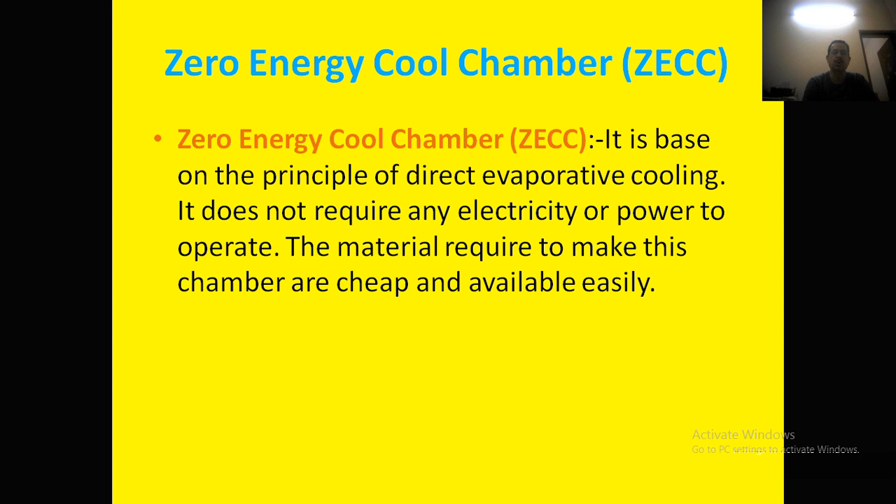First we'll discuss the zero energy cool chamber. It is based on the principle of direct evaporative cooling system. It does not require any electricity or power to operate. The material required to make this chamber is cheap and easily available.

Construction of the zero energy cool chamber: select an upland site having a nearby source of water supply. Make the floor with brick, 165 cm by 115 cm. Erect a double wall to a height of 67.5 cm, leaving a cavity of 7.5 cm.

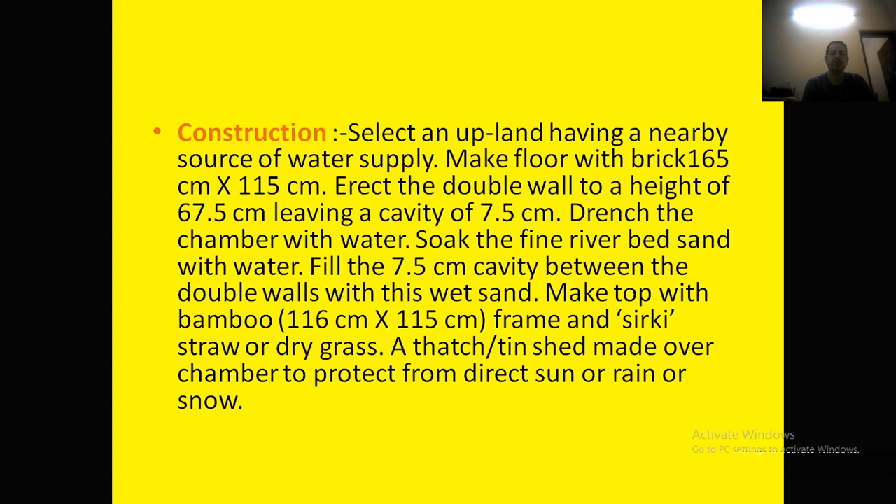Drench the chamber with water. Soak the fine riverbed sand with water. Fill the 7.5 cm cavity between the double wall with this wet sand. Make the top with a bamboo frame, 116 cm by 115 cm, and cover with sirki straw or dry grasses. A thatch or tin shed is made over the chamber to protect it from direct sun, rain or snow.

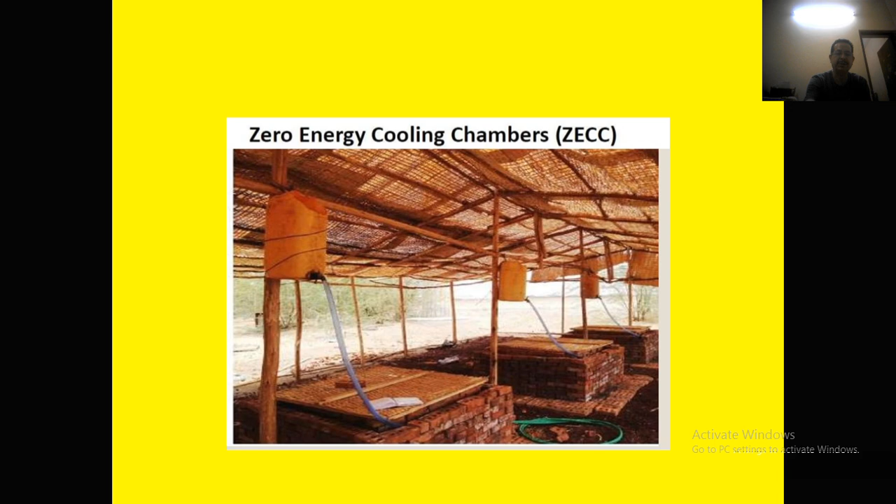This is a picture of the zero energy cool chamber. This is a picture of a series of zero energy cool chambers. The water is connected to a tank which flows into the double wall cavity, as shown in the picture.

How it is operated: keep the sand, brick and top cover of the chamber wet with water. Water twice daily, morning and evening, to achieve the desired temperature and relative humidity. Alternatively, fix a drip system for watering with plastic pipes and micro tubes connected to an overhead water source.

Store the fruit and vegetables in perforated plastic crates. Cover the crates with a thin polythene sheet. Cool chambers should be reinstalled once every 3 years with new bricks. Utilize the old bricks for other purposes.

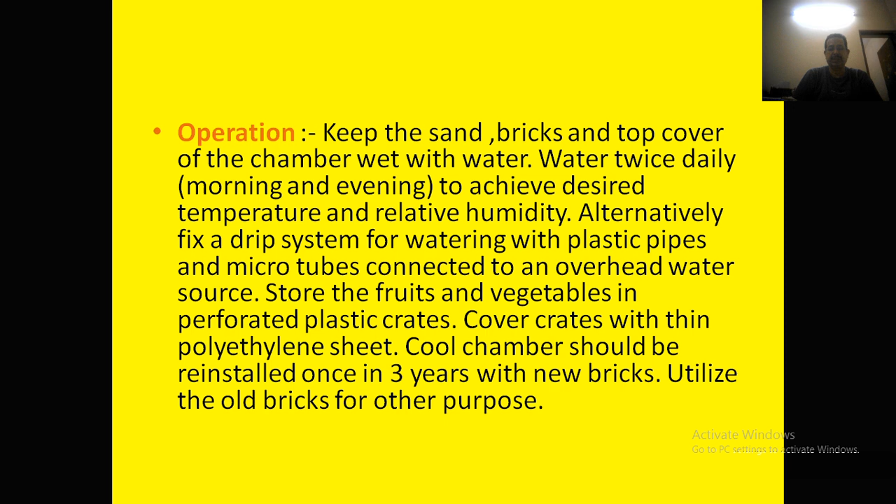Scope of the cool chamber: the proposed cool chamber can be installed in different places for handling fresh produce. In present practice, fruits and vegetables arrive in the wholesale market early in the morning and are purchased by the retailer or consumer before noon. At present, fruits and vegetables are handled in open sheds.

The freshness is prone to considerable deterioration. It is suggested that a battery of such commercial-sized cool chambers can be installed in wholesale markets located near big metropolitan cities.

Units can be installed in two rows with a corridor in between. Each unit will have two doors, one opening into the corridor and the other into the loading and unloading platform. The ducts are open on the roadside as well as on the corridor.

An overhead tank can perform the soaking of the side wall and tanks. Trucks can perform loading and unloading on the platform of each shed. Fruits and vegetables stored temporarily in a cool chamber unit before transit can retain freshness and quality.

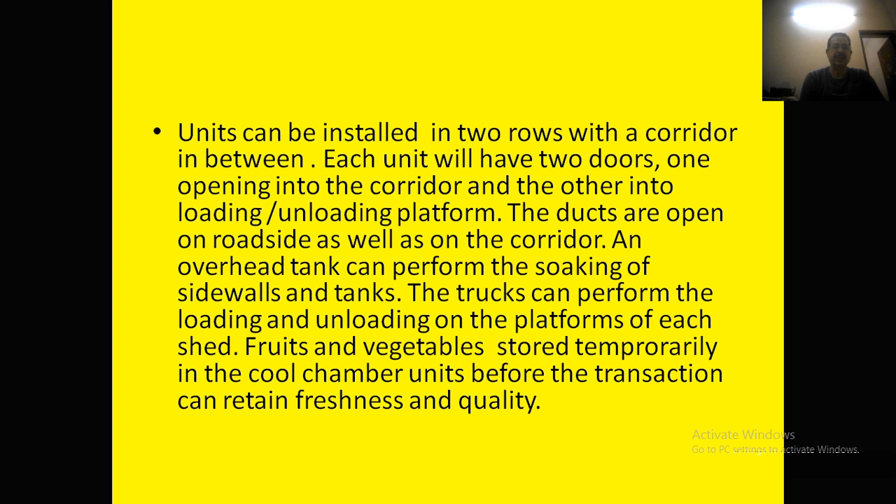Then, evaporative cool storage: it is the best short-term storage method for fruits and vegetables at farm level. It helps the farmer get better returns for their produce. In this structure, horticultural crops reduce traveling losses and extend their storage life.

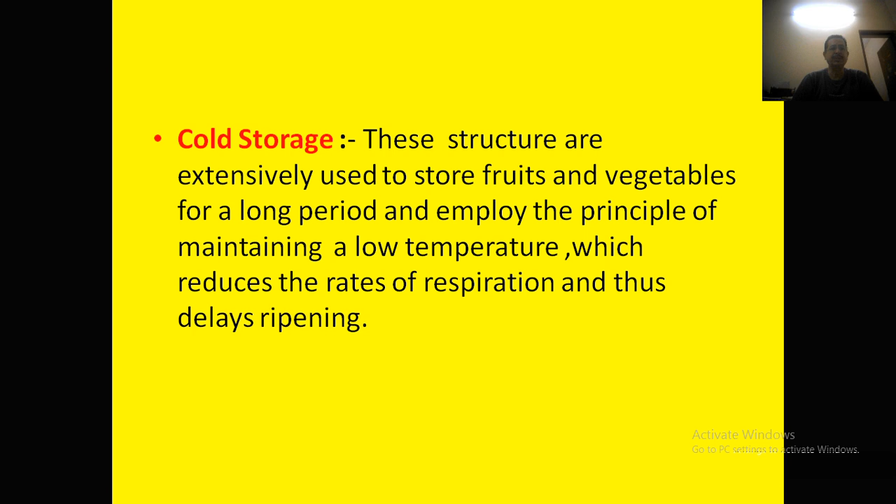Cold storage: these structures are extensively used to store fruits and vegetables for a long period and employ the principle of maintaining a low temperature, which reduces the rate of respiration and thus delays ripening.

Choice of method depends on the type of product available, duration of storage required, cost of storage involved, and the climatic condition of the place where storage is made.

Fruits and vegetables after harvesting continue to respire at the expense of stored food material, which, depending upon the rate of metabolism, can decline or accelerate aging, as evidenced by shriveling accompanied by change in texture, flavor and quality. Natural fruits and vegetables respire and lose heat and moisture through natural pores in the skin.

Removal of heat from freshly harvested commodity without quality loss is the most desired method for extending storage life of the perishable, which is accompanied by washing them in cold water at the production site for removal of the field heat. After removal of the heat, adequate size of cold storage is required.

Storage life of freshly harvested commodity is governed by the following: prevailing climate, that is temperature, relative humidity and airflow rate, and cultural practices of the region; then variety and stage of maturity at harvesting.

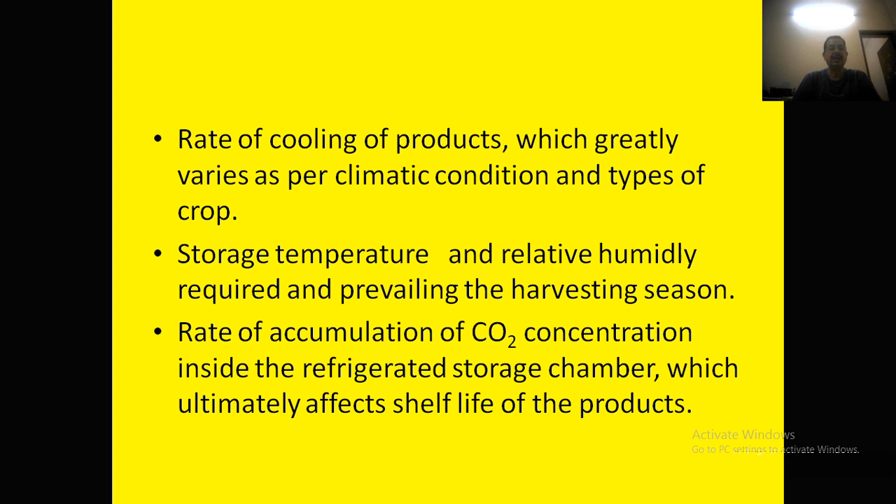Storage temperature and relative humidity required, and the prevailing harvesting season. Rate of accumulation of carbon dioxide concentration inside the refrigerated storage chamber, which ultimately affects shelf life of the products. Air distribution system in the refrigerated cold room, which helps in maintaining quality of the product.

Post-harvest treatment, size of package, quantity per package, and ventilation or air circulation inside the refrigerated storage are important for the storage life.

Sanitary condition inside the refrigerated storage room may affect the expected outcome.

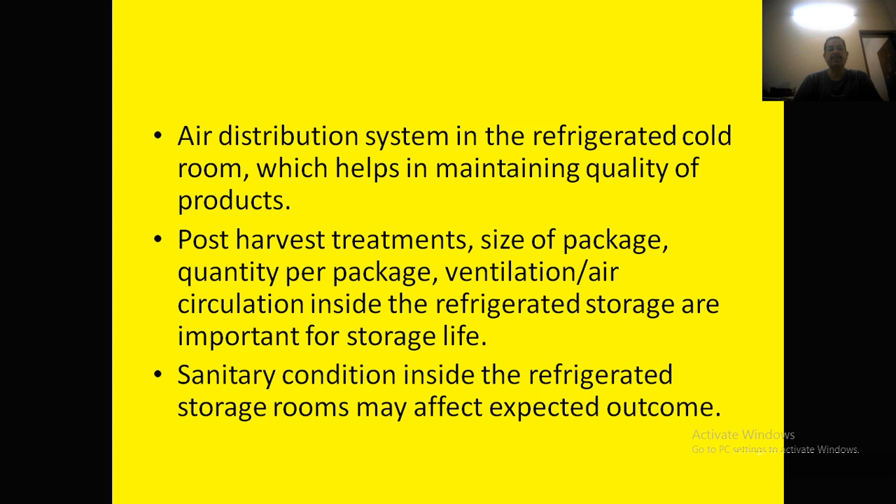Cold storage is one of the widely adopted methods for bulk handling of perishable products between production and marketing or processing. Maintaining adequately low temperature is critical, otherwise it will cause chilling injury to the produce. Further, relative humidity of the crop in the storeroom should be kept as high as 80 to 90% for most perishable products; below or above this has a detrimental effect on the keeping quality of the produce.

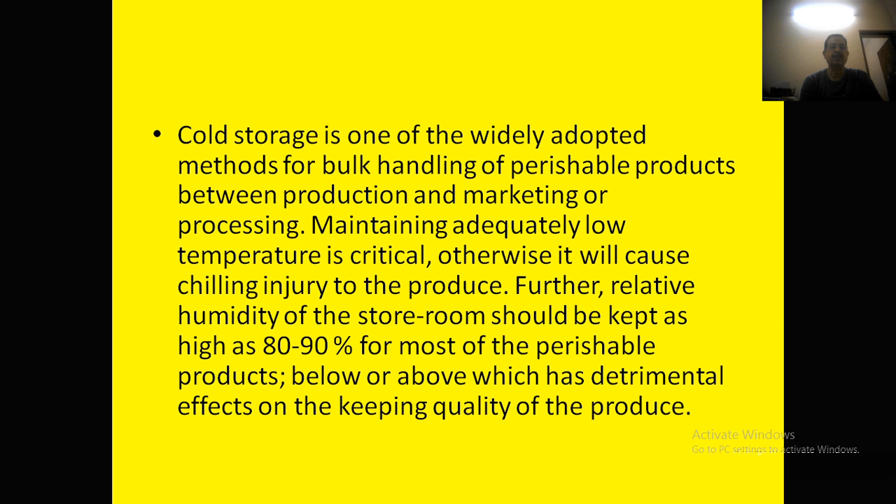Then controlled atmosphere storage. This is defined as an atmosphere in which oxygen is brought down to a low level and carbon dioxide is at a high level, created by the natural respiration of the packed commodity or by artificial means. These gases are controlled by a sequence of measurement and correction throughout the storage period, depending upon the type of fruits and vegetables in storage.

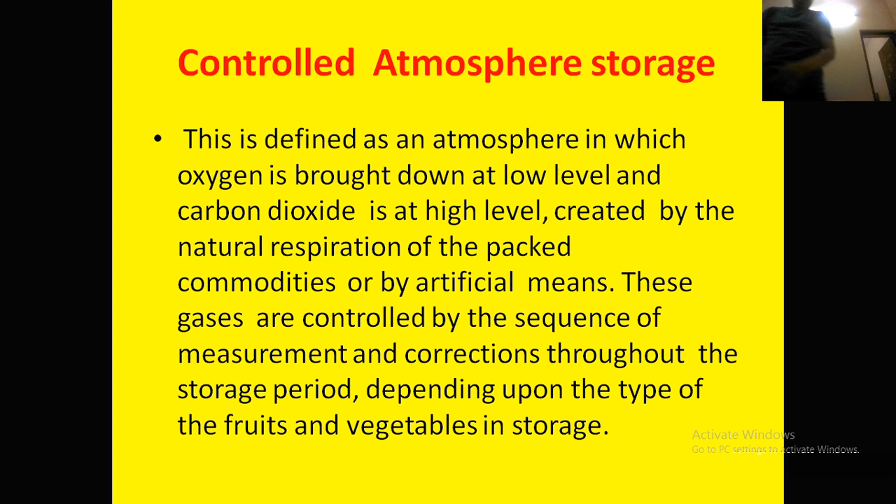In this method, control of oxygen and carbon dioxide around the immediate surface of the commodity and within the fresh fruits and vegetables results in a reduction in the respiration rate of the commodity. The levels of these gases are maintained by constant monitoring and adjustment within the gas tight store or containers.

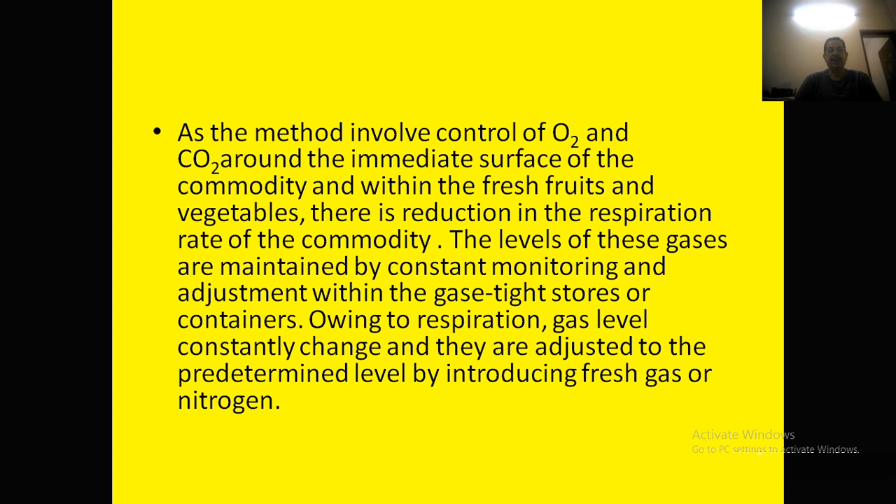Owing to respiration, gas levels constantly change and they are adjusted to the predetermined level by introducing fresh gas or nitrogen.

Then modified atmosphere storage. It is defined as the introduction of an atmosphere other than air into a food package without further modification or control and flushing into the product enclosure. The mixture is maintained throughout the storage life and no further measurement or control is required.

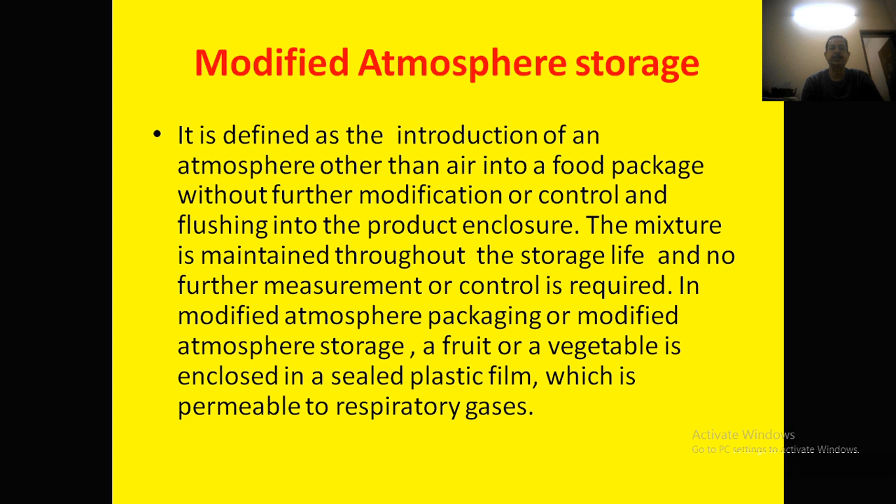In modified atmosphere packaging or modified atmosphere storage, a fruit or vegetable is enclosed in a sealed plastic film which is permeable to respiratory gases. Within the package, gases will change, producing a lower concentration of oxygen and a higher concentration of carbon dioxide than in fresh air, thus retarding ripening.

Modified atmosphere storage is the development of a modified atmosphere around the product through permeable polymeric film. It is an inexpensive method compared to controlled atmosphere storage.

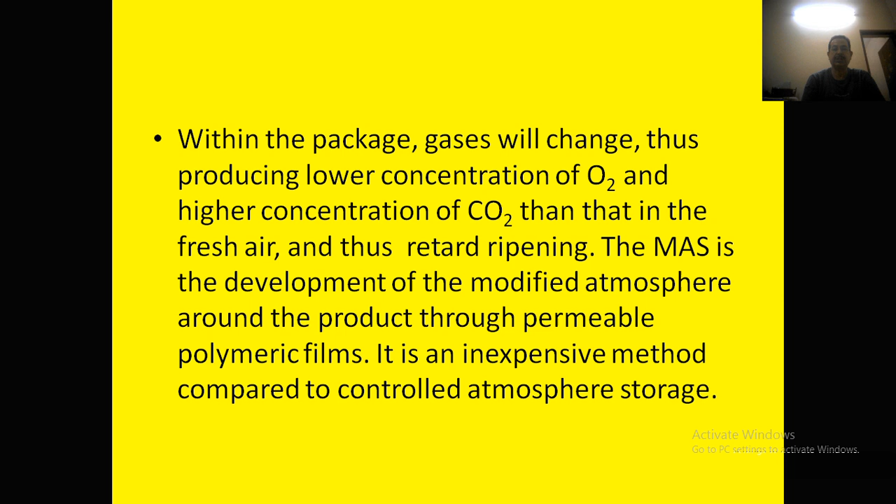In modified atmosphere storage, there is an alteration in the composition of gases in and around the fresh produce due to respiration and transpiration. When such commodities are sealed in plastic film, the film restricts accumulation and transmission of respiratory gases, resulting in accumulation of carbon dioxide and depletion of oxygen around the produce, which increases storage life. This method is used for produce that has high commercial value and requires constant attention during transit and storage for higher returns.

Atmosphere inside the sealed plastic film bag depends on the characteristics of the package material used, the inside environment, and the respiration rate of the produce. Changes in the gas content may take some time to reach equilibrium, and the speed of atmosphere change can be accelerated by flushing with nitrogen, or the pack can be connected to a vacuum pump to remove air so that respiratory gases change fast within the pack.

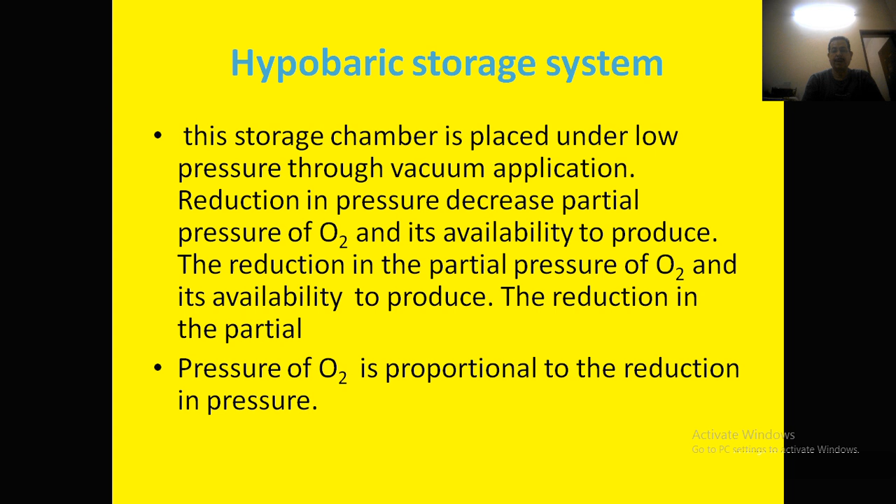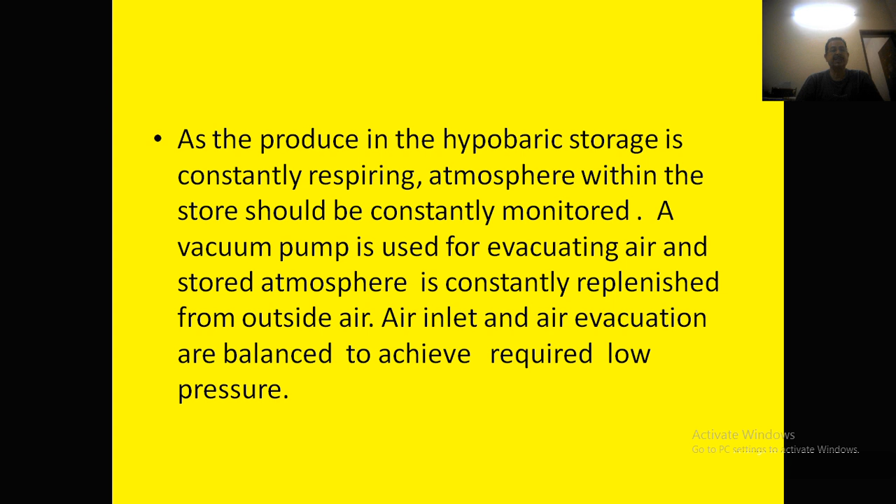As the produce in hypobaric storage is constantly respiring, the atmosphere within the store should be constantly monitored. A vacuum pump is used for evacuating air, and the stored atmosphere is constantly replenished from outside air. Air inlet and air evacuation are balanced to achieve the required low pressure.

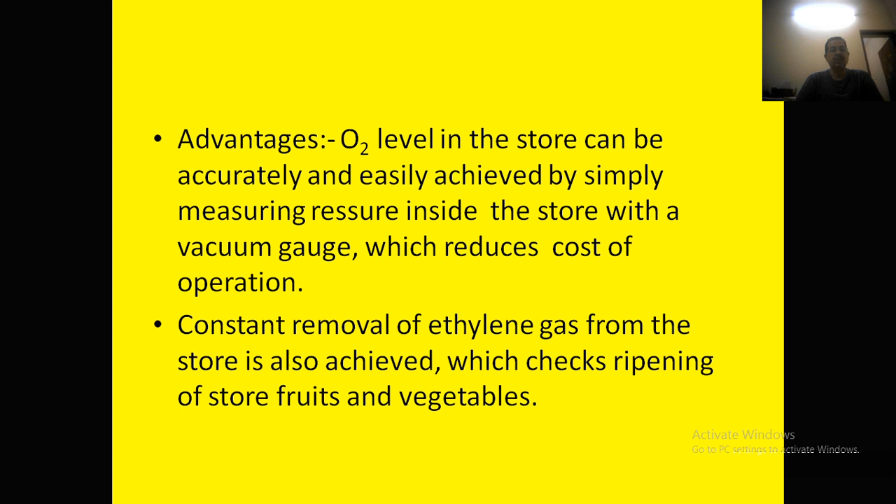Advantages of hypobaric storage: oxygen level in the store can be accurately and easily measured via a vacuum gauge, with reduced cost of operation. Constant removal of ethylene gas from storage is also achieved, which checks ripening of stored fruit and vegetables. So this is all about the storage of fruits and vegetables.